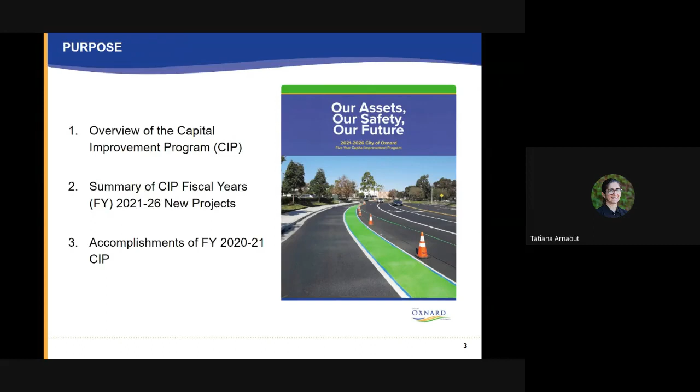So what is the CIP? Essentially, it's the city's plan to build or restore our facilities over the next 5 years. It does not address maintenance work, but some examples of projects include construction and major alterations of buildings, hardware for IT, replacement of cast iron and asbestos pipes, replacement of playground structures, street rehab, traffic signal rehab, and work over at our wastewater plant, our water campus, and the materials recycling facility off of Del Norte.

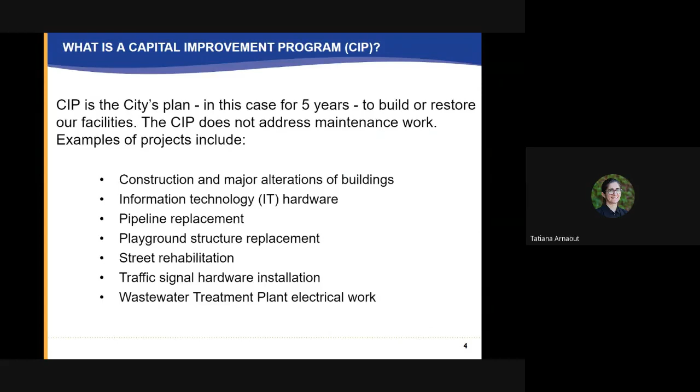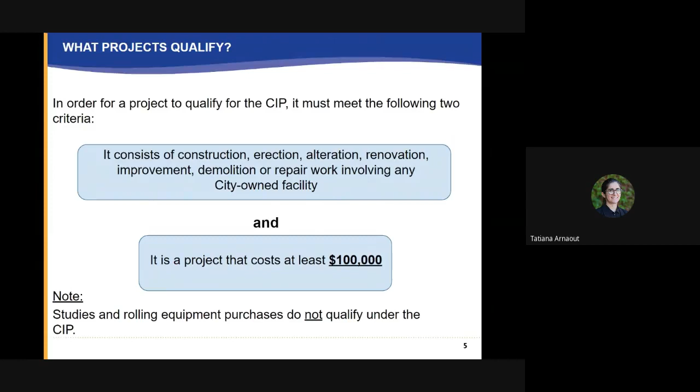Things of that nature - any city-owned facility that requires improvements falls under the Capital Improvement Program. So what kind of projects qualify under the CIP? Essentially, they must meet 2 criteria. First, it must consist of construction, erection, alteration, renovation, improvement, demolition, or repair work involving any city-owned facility. And it must be a project that costs at least $100,000. I do like to note that studies and rolling equipment do not qualify under the CIP.

So what is the process we go through to produce such a document? Basically, the departments identify the necessary capital improvements across the board, whether it's facility work, street rehab work, pipe replacement work, things of that nature. We gather all the data here in Public Works Engineering, and then we review the projects for conformity with the general plan, and against any other need assessments that have been conducted previously.

Then we verify cost estimates and determine the priority for funding. We wrap that all up, put it into an actual CIP book, and present that to the Planning Commission to determine conformity with the general plan. Finally, we present the CIP to the Public Works and Transportation Committee, which was already done, and now I'm here presenting to City Council for approval.

The CIP has 4 appendices at the very back. They all show the same projects, sorted in various ways. Appendix A sorts by fiscal year and then funding source. Appendix B sorts by fiscal year, then by district. Appendix C by fiscal year alone. And finally, Appendix D by fiscal year, then by priority.

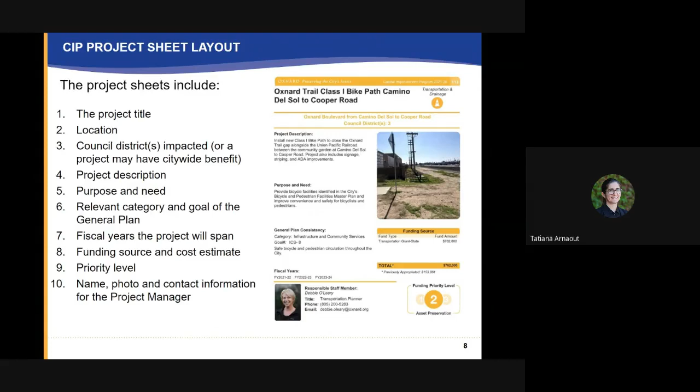Some of the projects that are out in future fiscal years will just say to be determined, and that's because that's an outer project. We haven't actually identified an individual that will be managing that. We will be doing that as we get closer to actually starting those projects.

All right, so now we're going to get into the part of the presentation where I'm going to be showing you the new projects that you will find in the capital improvement program. These are projects that have not shown up in the CIP previously.

We are also adding a Wi-Fi in the parks project. The idea is that we're trying to create spaces for the children in our various neighborhoods to have access to Wi-Fi should they not have internet access at home. That is an endeavor we'd like to start on here in the relatively near future.

In addition to that, we are going to go ahead and do a project that we just got grant funding for, which is for the Ramona Preschool pedestrian crossing improvements. That has made it into this year's CIP as well.

We also have added a citywide public restroom improvements project, a new senior center at 5th and Patterson, again one of the council priorities, so that made it into the CIP as a result. South Oxnard Senior Center tenant improvements and the Wilson Senior Center tenant improvements.

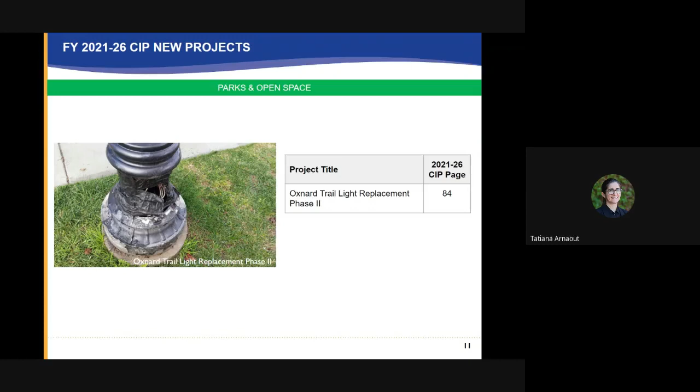In addition to that, under Parks and Open Space, we have added the Oxnard Trail Light Replacement Phase 2 project, and Wi-Fi in the parks that I mentioned previously.

We are also doing citywide intersection improvements, Cypress Road Railroad crossing upgrade, 5 Points intersection modernization, as well as a 5 Points intersection traffic signal rehab project. One is to essentially just rehab what we have there today so that it remains functional, but we also do want to strive to modernize that intersection.

So we'll be starting the design on that as well simultaneously. We also have the Oxnard Trail Class 1 bike path from Camino del Sol to Cooper Road, which we received a grant for recently. We are also adding the Oxnard Trail Class 1 bike path from Cooper down to 2nd. We are seeking grant funding for that.

I mentioned the Ramona Preschool pedestrian crossing enhancements, which we received grants for. We also received a grant for the Safe Routes to School Safety Enhancement Project, so that's made it into the CIP as a result. We've also added stormwater conveyance improvements along Oxnard Boulevard, and finally, the US 101 and Del Norte interchange upgrade project has been included as well.

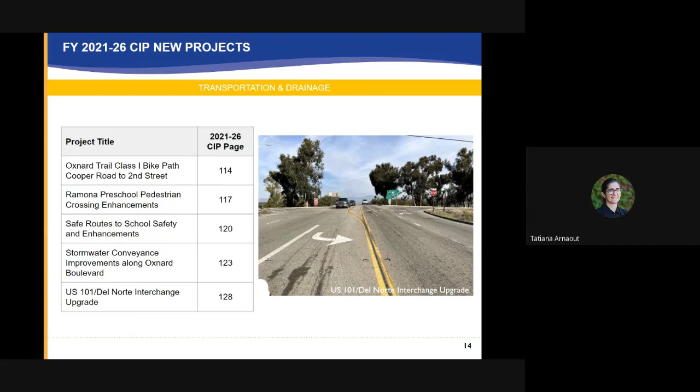We are seeking grant funding for that project. Under utilities, we've added the environmental resources tenant improvements project, a couple over at the Oxnard wastewater treatment plant, which included the effluent pump station improvements, the maintenance building expansion, and the plant control center locker room remodel.

In addition to that, for water distribution, we've added the improvements to the CMWD transmission main. That's a 45-inch main that actually supplies the cities - I believe about 50 to 60% of our water supply comes from this transmission main. So there's a project where we intend to repair the pipe that's there now and then create a redundancy, actually installing a whole new pipe adjacent to it so that in case one goes down, we have the other to tap into. And finally, for water production, we have the blending station 1 transfer switch and panel replacement.

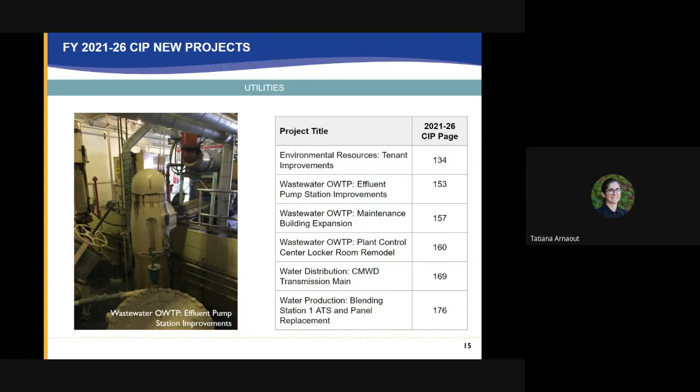We can't talk about the CIP as a whole without addressing the fact that there are underfunded capital needs. One of the most notable are the citywide street improvements, which relates back to our pavement management update presentation that will also be on the same council agenda. The citywide alley reconstruction similarly, and various stormwater system upgrades throughout the city that we do not have funding identified for.

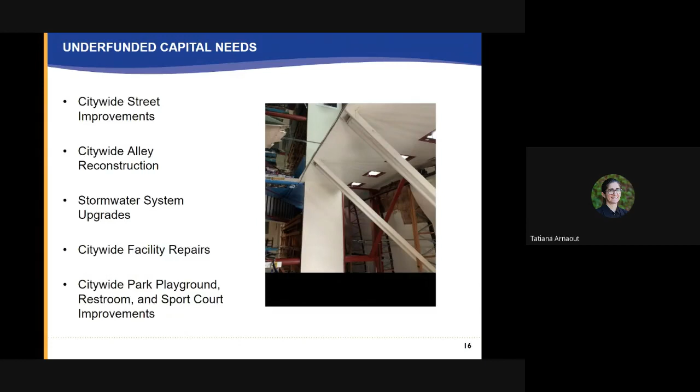Some of the challenges we also face are that we have limited resources across various city departments that affect our workflow. It's not just about whether Public Works Engineering has the staff to manage these projects from design to construction, but with all the contracts we put out, that actually affects our friends in purchasing, finance, and public works administration. There's limited resources across the city, and it impacts how we deliver these projects. We also anticipate an increase in workload due to Measure-E, and with limited resources, they'll be further impacted as a result.

Not to say Measure-E is a bad thing - it's obviously a fantastic thing, except that that's just something I need to point out.

We have been experiencing a lot of construction delays, primarily due to material shortages across the board. For instance, our HDPE pipe, or plastic pipe in general, is severely delayed as a result of the Arctic event down in Texas and Louisiana, where the majority of that plastic pipe is produced. Rolling blackouts and things of that nature have slowed the production of concrete, so we're seeing delays in that.

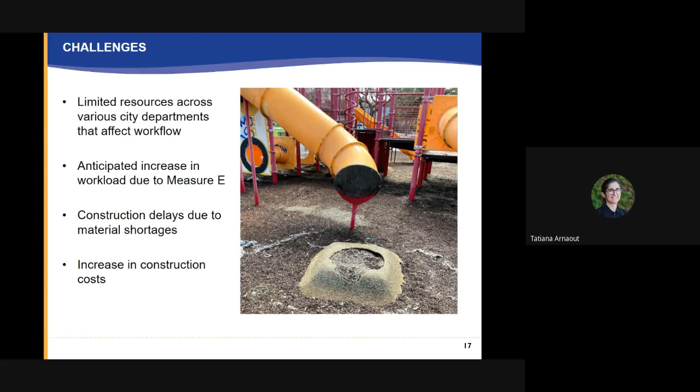And of course, with those delays and supply and demand rules, we are seeing an increase in construction costs. Those are not something we can easily predict, and definitely not accurately. We do our best and use any relevant data, but that is, again, a challenge that we face.

As far as resources we need to complete these projects in a timely manner, I am recommending that we have several on-call construction contracts put in place. First and foremost is a street resurfacing on-call contract - I mentioned it in the pavement management update presentation, and I'm saying it here again. We need an on-call construction contract for street resurfacing and alley reconstruction in order to achieve those goals for those projects in a fast and efficient manner.

In addition to that, I am looking to get approval in the future for on-call construction contracts for roof repairs and replacements, as well as playground replacements. Not only do we need additional staff, but we already have some challenges with lack of office space for the staff we have, or the vacancies we have now. So that's just, again, a challenge, but also a resource that we need.

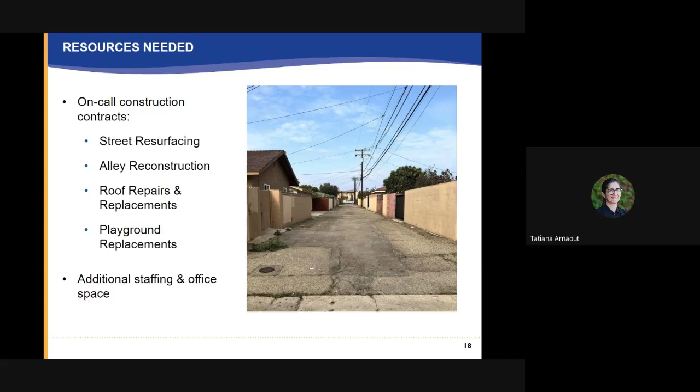Enough of that, let's get into the good stuff. For this past fiscal year, this is what we've accomplished thus far. We have 35 projects currently actively in the design phase, 12 in the bid phase, 15 in construction right now valued at about $35 million, and another 15 completed valued at about $15 million. The majority of those are the street resurfacing projects that a lot of the community has noticed. I will be highlighting a few of those projects from this fiscal year, as well as providing the actual full list of completed projects.

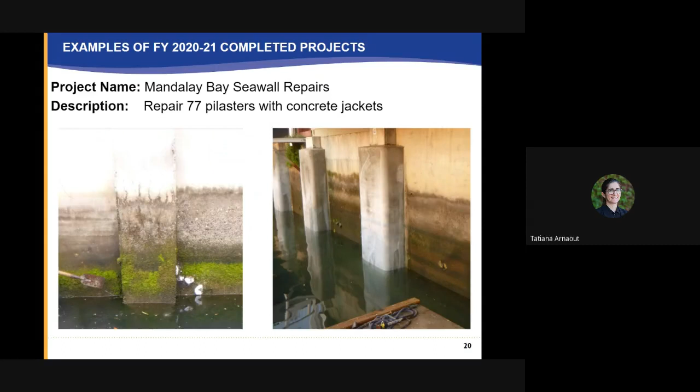For starters, the Mandalay Bay seawall repairs - we repaired 77 pilasters with concrete jackets. Here's a before and after photograph of that.

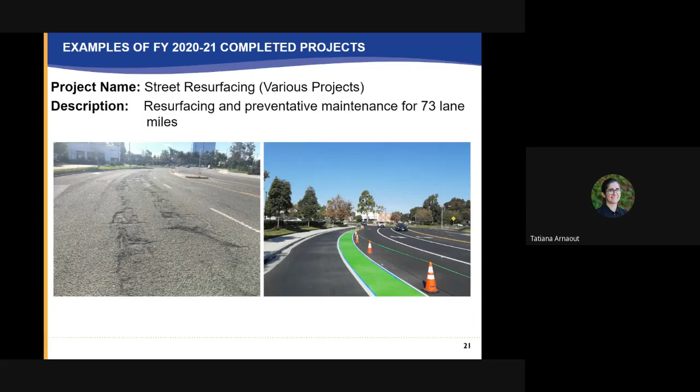Street resurfacing throughout the city - again, I know we've been getting a lot of actual public comments at our council meetings, and I'm very grateful for that, because our staff should know that people are noticing and that they're being acknowledged for the work they're doing. I hope those keep on coming. This is just a sample image of Esplanade Drive getting resurfaced.

By the end of the fiscal year, we anticipate the roof replacement for the Powell South Wing will be done. The Oxnard Trail Light Replacement Phase 1 should be completed. We've completed the pilaster jacket repairs at Mandalay Bay.

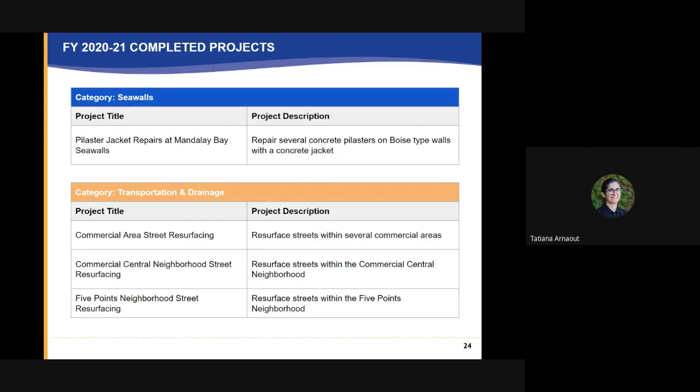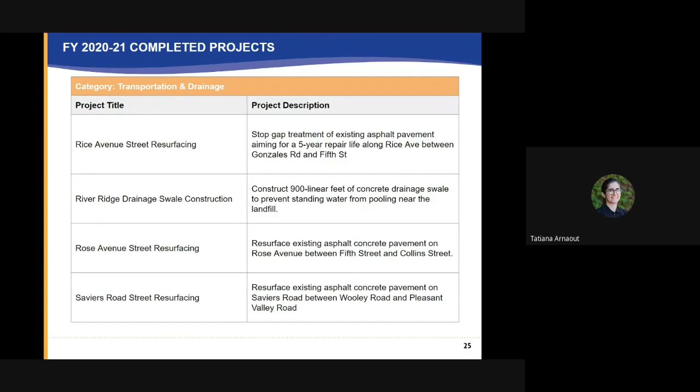Here are all the various street resurfacing projects that we were able to complete this last fiscal year: commercial areas, street resurfacing, Commercial Central Neighborhood, Five Points Neighborhood, Rice Avenue, Rose Avenue, Saviers Road. We also have a drainage swale construction over at the River Ridge Golf Course. This was for regulatory purposes, but that was completed as well.

In addition to that, we replaced 31 existing battery backup systems through the traffic signal modernization project. We resurfaced Vineyard from the 101 to Oxnard Boulevard. That was one of note - I know that was affecting a lot of our community, and especially commuters coming into the city, things of that nature.

We also installed a brand new traffic signal and pedestrian ADA improvements and crosswalks over at Rose and Gary, right in front of Oxnard College. And finally, we had our thin maintenance overlay phase 2 project, which was just preventative maintenance throughout the city. I think a lot of the community noticed, and I'm grateful for that.

Under the utilities, we are actually currently in construction and anticipate will be done by the end of the fiscal year for the waste tipping floor restoration. And finally, that roof repair that I showed images for earlier, that was completed as well.

As far as the financial impact goes, there is no direct fiscal impact with the adoption of this proposed 5-year CIP. The CIP provides a full fiscal presentation of the capital projects planned to be undertaken in the next 5 years, provided the funding is available. So that has to be noted.

While we would love to get all those projects done in the next 5 years, it's all contingent upon funding and resources. Projects that council identifies and approves to be adopted in the CIP for fiscal year 21-22 will be presented for adoption during the city's budget approval process in June, next month.